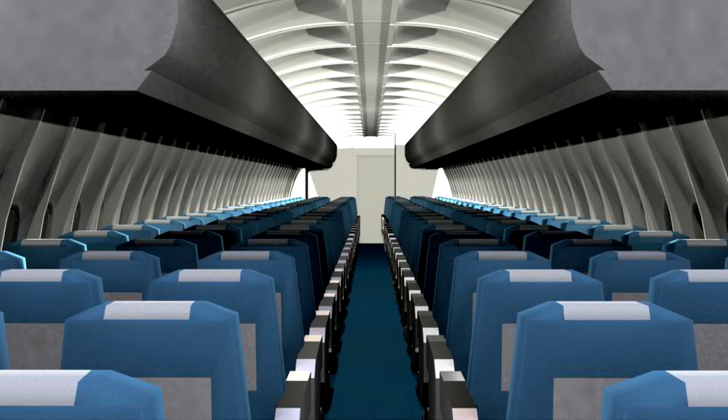In this lesson, we will look at the other components which, along with the air conditioning packs, make up an aircraft's air conditioning system. We will then examine how the air temperature is controlled and how the air is distributed throughout the aircraft. We will finish off by having a quick look at a vapor cycle air conditioning unit.

When operating on the ground or at low altitude, the charge air entering the air conditioning pack may be very humid. When the air is cooled, this humidity will condense out as water droplets. In order to prevent it raining on the passengers and crew, a water separator is fitted in the pack downstream of the turbine of the air cycle machine.

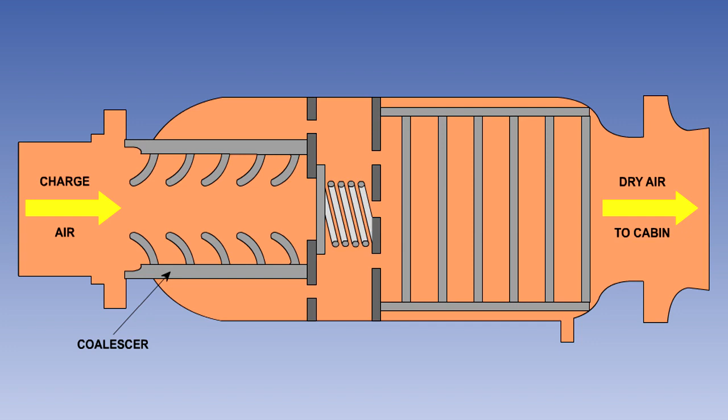The water separator consists of two parts: a coalescer and a series of collector tubes.

When the air leaves the air cycle machine, the water will be in very small droplets, in the form of a fine mist. The purpose of the coalescer is to increase the size of the water droplets. It consists of a filter, normally of coarse wire gauze.

The water droplets come together on the gauze, forming larger drops before they are carried through to the second stage, where a swirl is imparted into the air. The centrifugal force throws the water drops outward. When they strike the collector tubes, they run down to the bottom of the case and exit via the water drain.

The relief valve will open to safeguard the airflow to the cabin should the coalescer become blocked with ice or debris.

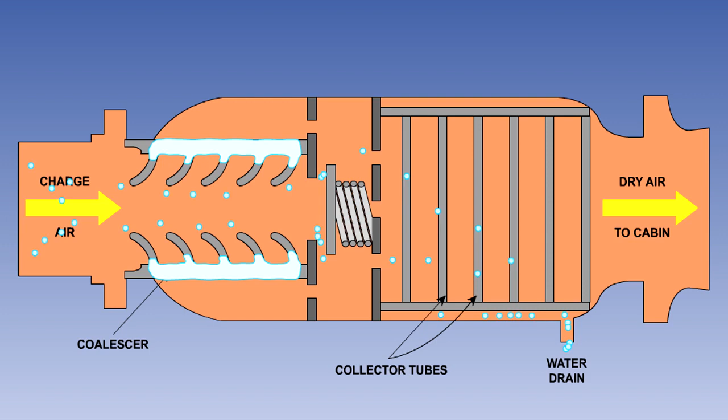The water separator does most of its work in low-altitude, humid conditions. However, at the high cruising altitudes used by modern transport aircraft, the air is very dry. When operating at high altitudes for long periods of time, it may be necessary to increase the moisture content of the conditioned air from the 1 to 2% relative humidity of the ambient air to a more comfortable level.

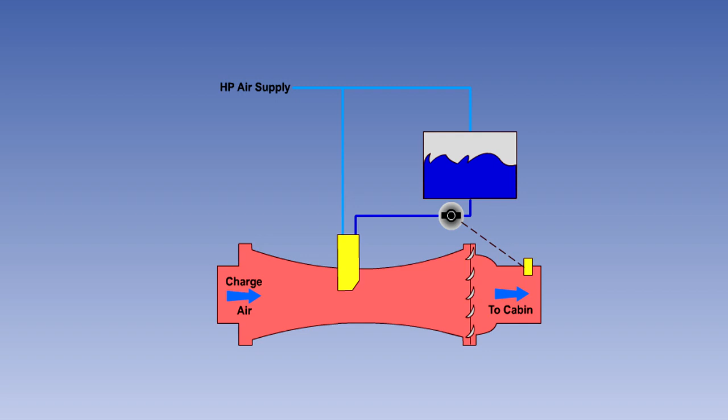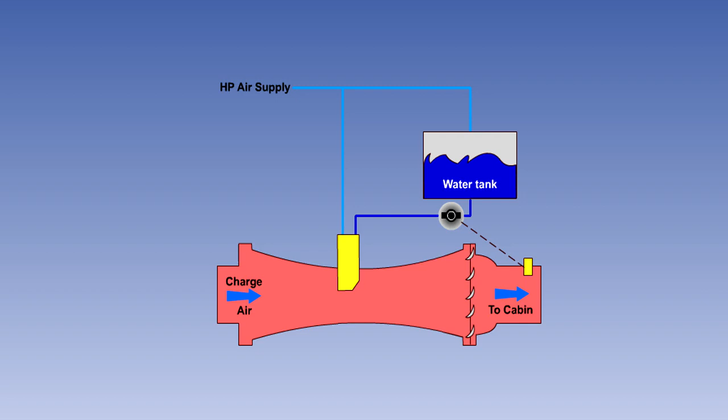The component used to do this is the humidifier, a typical example of which is shown here. The water tank contains drinking water. It is pressurized by bleed air from the engines. This tank is usually referred to as the potable water tank.

The water jet is fitted in a venturi tube downstream of the water separator in the conditioned air duct. Bleed air is also fed into the jet. This, and the reduced static pressure of the dry air caused by the Venturi effect, ensure that the spray of water mist is absorbed into the air.

The fabric-covered swirl vanes further ensure that the air and moisture are thoroughly mixed. The fabric absorbs any extra moisture, giving it back when the humidifier is switched off.

The water supply valve is controlled by a humidistat. This is a device which can measure humidity and operate a switch when a particular level is reached. It is measuring the humidity in the air conditioning duct. When the humidity falls below a predetermined level, the valve will open and humidification will commence.

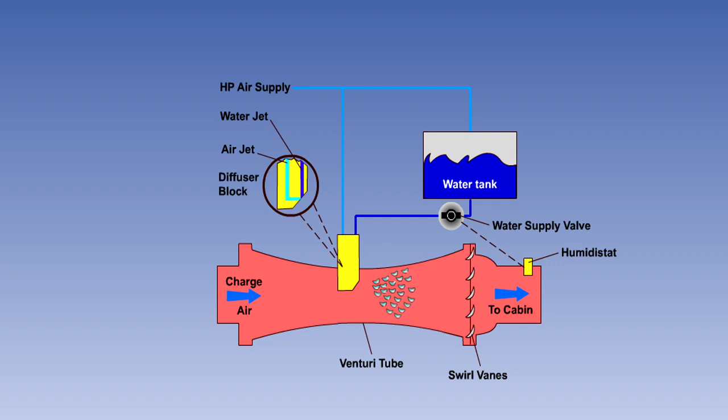The pack flow control valve may incorporate a mass flow controller, or it may be a separate unit. The mass flow controller is fitted to ensure that a constant mass flow of air is supplied to the air conditioning packs, regardless of the engine RPM or intake air pressure. This helps to make control of the aircraft pressurization much easier.

When used with blower systems, the mass flow controller operates a spill valve, which dumps excess air to atmosphere. In systems that use engine bleed air, the mass flow controller adjusts the airflow through itself, so that the required mass flow passes to the system irrespective of changes in the value of the pressure upstream and downstream of the unit. The simplified mass flow controller shown here consists of a piston with cutouts in its face and barrel, which moves inside a cylinder with matching cutouts in its barrel.

When the inlet pressure is low, the spring will push the piston fully to the left, and the cutouts in the barrels will be fully aligned, allowing maximum airflow through the unit.

As the inlet pressure increases, the mass flow will tend to increase. However, the increased pressure on the face of the piston will move it to the right against the spring, reducing the airflow through the unit. Thus, with pressure changes, the piston position will modulate in the cylinder, maintaining a constant mass flow to the packs.

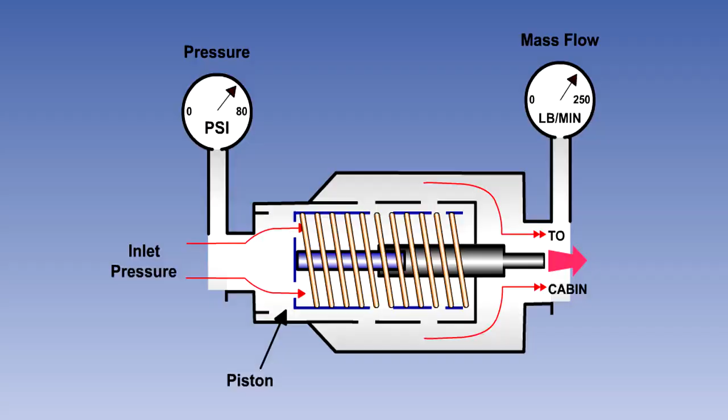Control of the pack outlet temperature is usually achieved by mixing hot air with the cooled air from the air cycle machine. The temperature control can be either manual or automatic.

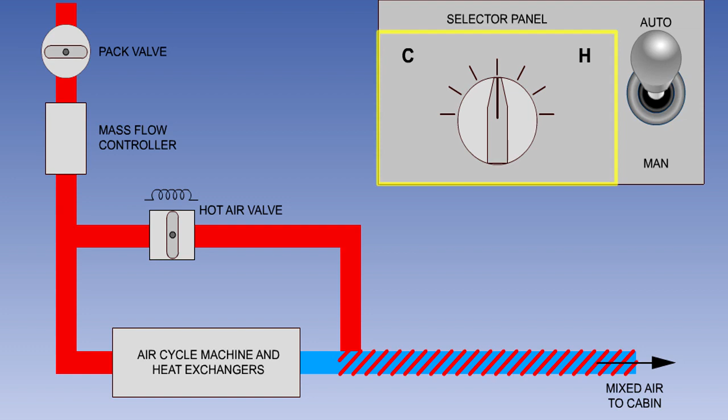Automatic temperature control is achieved by comparing a pilot-selected temperature with the actual temperature of the air. In your aircraft, you will find that the selector does not have temperatures marked on it, but merely hot and cool. However, to aid understanding, we will mark our selector with temperatures.

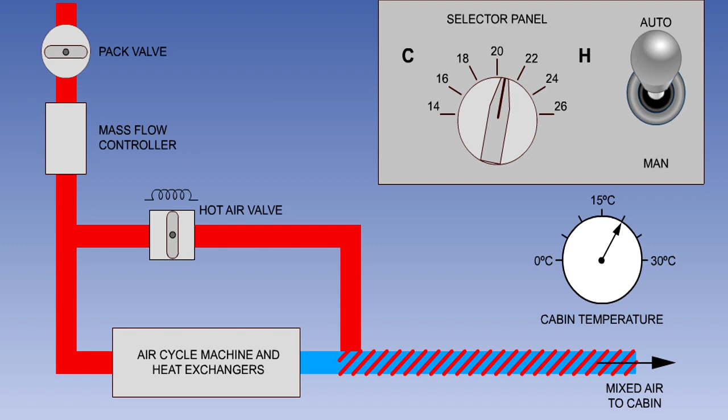The temperature of a sensor in the cabin is compared electronically with the selected value, and any difference modulates the hot air valve to allow more or less hot air to bypass the cooling components to increase or decrease the cabin temperature. If, for instance, the pilot selects an increase in temperature, the hot air valve will open to warm up the cabin. Once the selected temperature is reached, the valve will modulate as required to maintain it.

If the manual/auto switch is moved to the manual position, the hot air valve will now move in direct response to the temperature selector switch position and remain in the selected position. The pilot is now no longer selecting a temperature; instead, he is selecting the amount of hot air to be added. The cabin temperature achieved will vary with the environmental conditions.

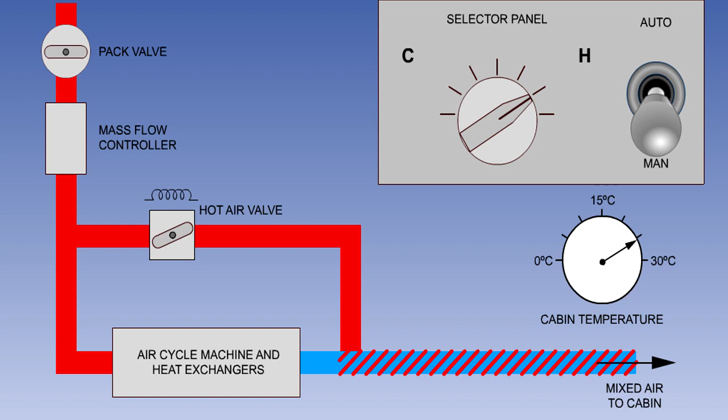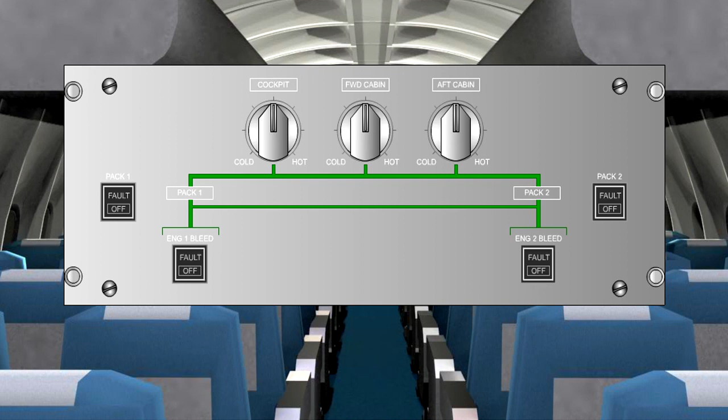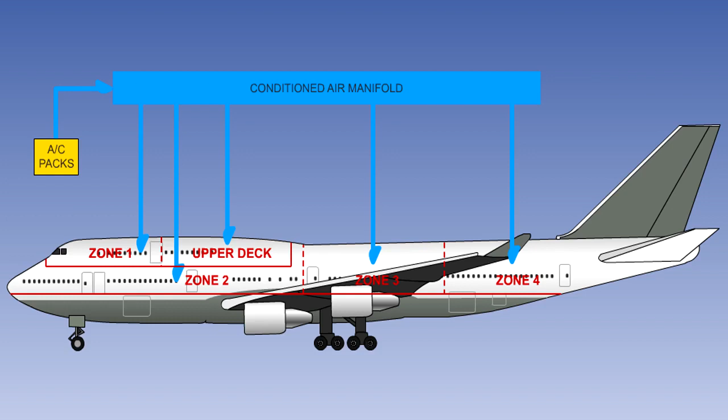In order to avoid large temperature gradients between the extremities of the cabin, it is often necessary to divide the cabin into zones and control the temperature in each zone individually. This control is achieved from the flight deck using zone control knobs or switches. The larger the aircraft, the more zones there will be. The Boeing 747 has 5 zones, whereas the Airbus A320 has 3.

The temperature of the air delivered by the packs is determined by the zone requiring the coolest air input. This will normally, but not always, be the flight deck.

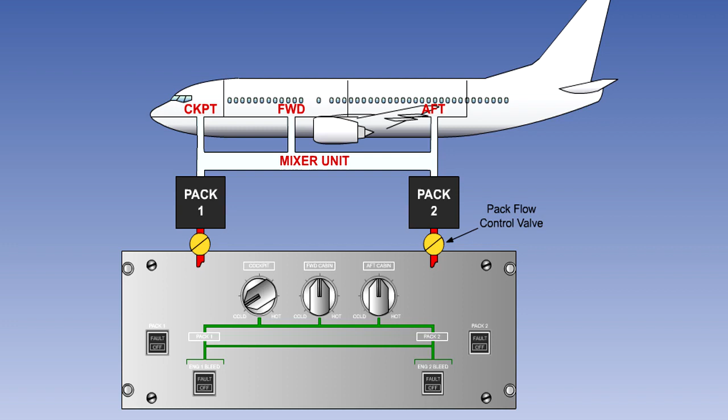Individual zone requirements are satisfied by adding hot trim air from the bleed air system to the output of the air conditioning packs. The amount of trim air added is controlled by zone trim air valves. Their positions are dependent on inputs from the individual zone temperature control systems. The trim valve for the zone requiring the coolest air will be closed.

The hot air pressure regulating valve modulates to control the pressure of the trim air. If required, this valve can be closed by a switch on the control panel.

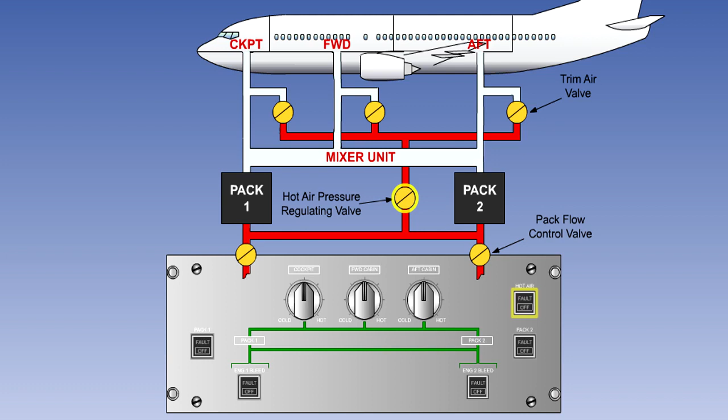Most passenger transport aircraft supply warm air to the cabin by means of floor and wall passages, and this warm air maintains the interior surfaces at cabin temperature, reducing drafts and direct heat losses, which in turn allows the entering air temperature to be closer to the cabin temperature.

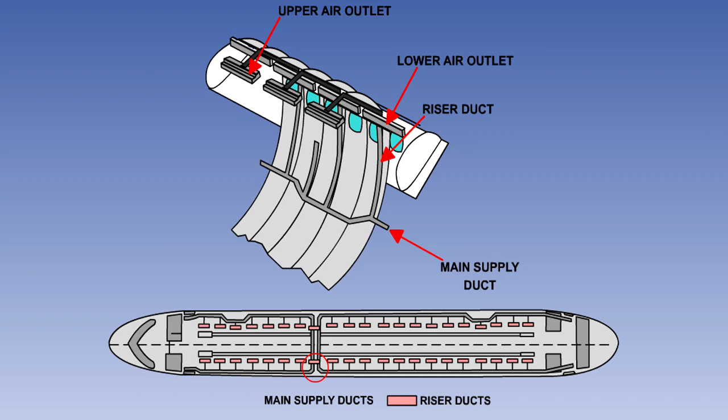Recirculation fans are used to augment the air conditioning packs, allowing a reduced number of packs to be used during the cruise, which decreases engine bleed requirements and improves fuel economy, while still maintaining a constant ventilation rate throughout the cabin.

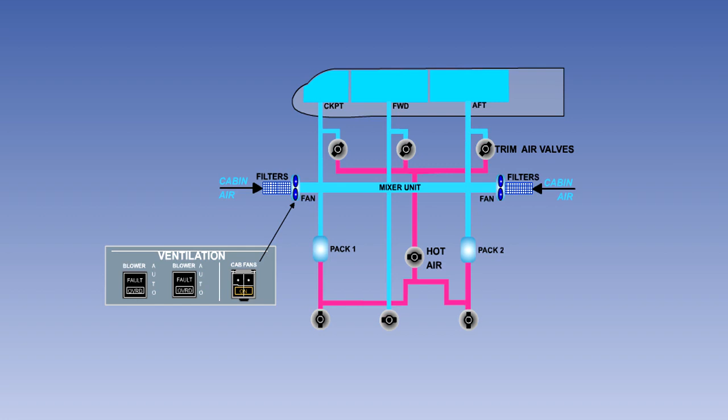The fans draw cabin air from the underfloor area through filters, then reintroduce the air into the conditioned distribution system. Air from the areas around the toilets and galleys is not recirculated, but is vented directly overboard.

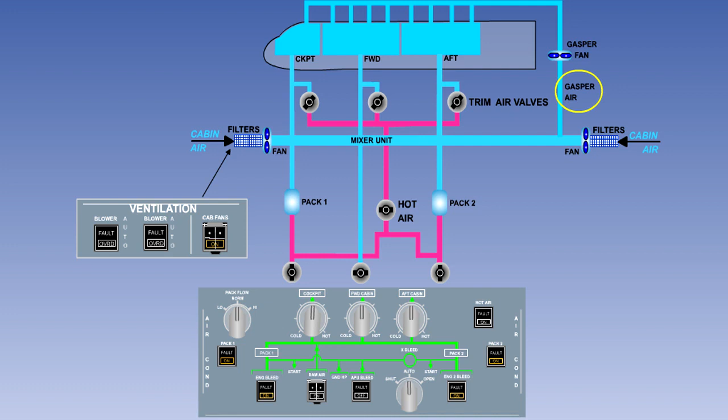The ducting is in 2 distinct sections, to provide for separate flows of cold and heated air. The cold conditioned air is supplied to the passengers individually, through a system known as the Gasper air system. Gasper air is tapped from one of the zone's supply ducts upstream of where trim air is added. The Gasper fan provides a positive supply of conditioned air to all zones through individually controlled outlets or punkah louvers.

Conditioned air is supplied to the flight deck crew stations, where it can be adjusted for flow direction and quantity. It is also supplied to the flight deck windows for demisting purposes.

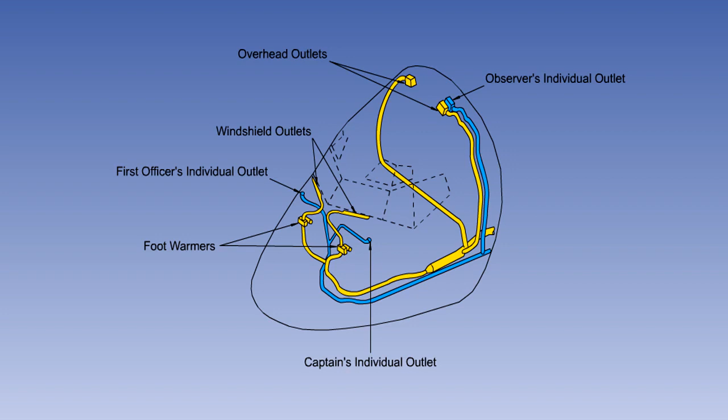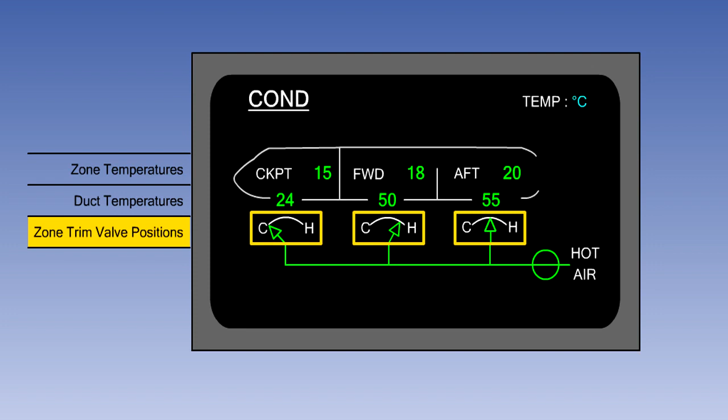The crew also receives warnings in the event of malfunctions in the system. For instance, if the temperature of the air in the trim air duct becomes excessive, the amber fault light in the switch will illuminate.

The vapor cycle air conditioning system is similar in operation to the domestic refrigerator, or the galley cart cooling system used on some large aircraft. Its use for aircraft is now generally limited to small piston engine types.

The system uses a refrigerant, normally Freon, which alternates between the vapor and liquid states. It is compressed, cooled, expanded, and heated in that order. The refrigerant is a liquid which boils at approximately 3.5 degrees Celsius at sea level atmospheric pressure. At higher pressures, the boiling point is increased, and vice versa.

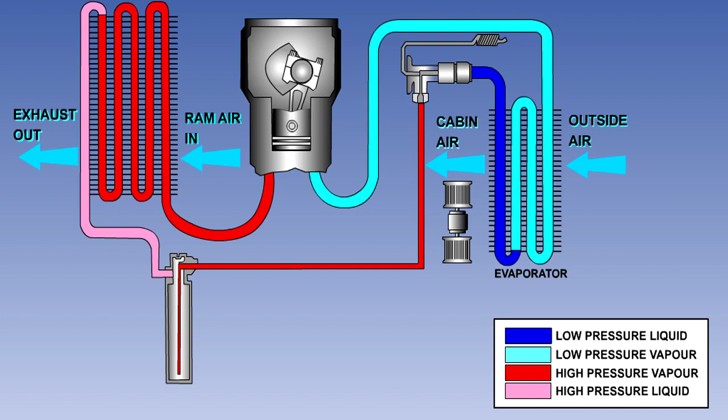The major components of the system are the evaporator, the compressor, the condenser, the expansion valve, the receiver, and the electrically driven blowers which pull outside air into the aircraft across the evaporator.

The system operates on a continuous cycle, but in order to explain the system more clearly, we will look at a unit of Freon as it makes its way around the system.

The receiver, which acts as a reservoir, contains high-pressure liquid Freon. On leaving the receiver, the Freon comes to the expansion valve. This valve allows the Freon to expand, reducing both its pressure and temperature as it enters the evaporator.

As the Freon passes through the evaporator, it takes heat from the cabin air, therefore cooling the cabin air. As the temperature of the Freon increases, it boils, changing from a liquid to a low-pressure vapor. The compressor raises the pressure and the temperature of the vapor before it enters the condenser.

The condenser is positioned so that cold ram air passes over it. This causes the vapor to give up its heat, causing it to condense back into a high-pressure liquid. The pressurized liquid then passes to the receiver, ready to begin the cycle again.

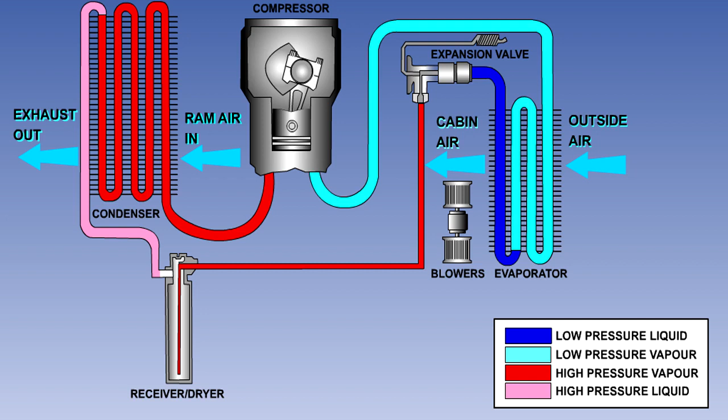That is the end of the lesson. You should now know that air conditioning systems may have a centrifugal water separator for use at low altitude, and a humidifier supplied with potable water for use at high altitude.

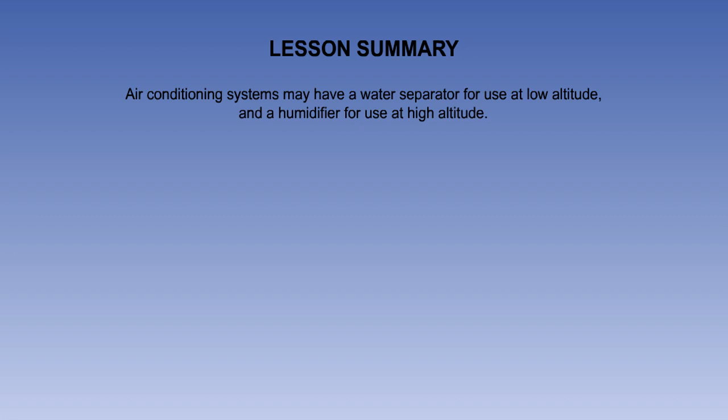You have seen that the mass flow controller ensures that the air conditioning packs receive a constant mass flow of air throughout their operating envelope.

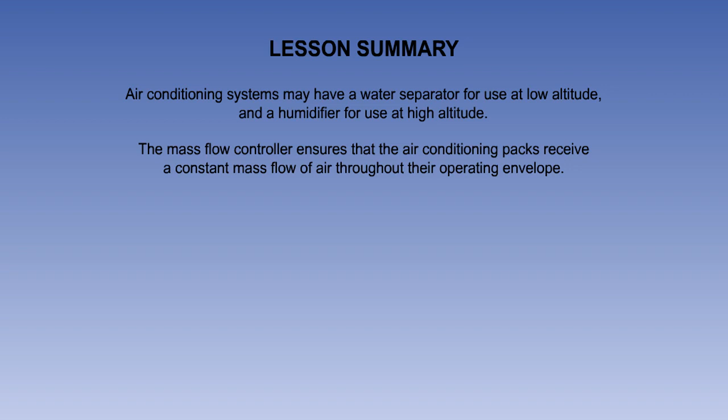You should know that the cabin is split into a number of zones, and that the outlet temperature of all packs is set by the zone requiring the most cooling. Zone trim valves add hot air to the other zones to satisfy their requirements.

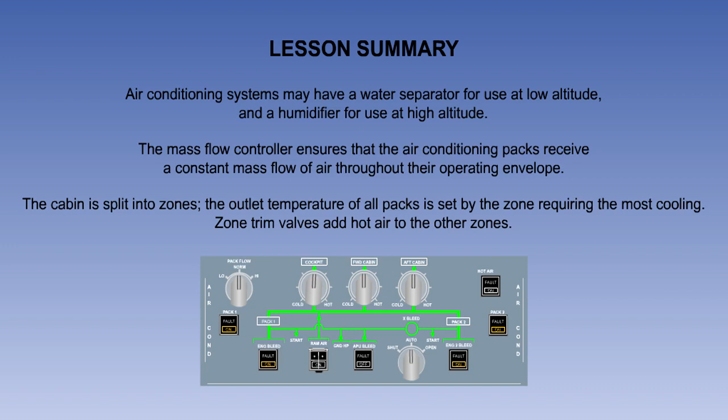Recirculation fans are used to augment the air conditioning packs. And the Gasper system supplies cool air to individual seats. Finally, you should have learned that on some smaller aircraft, a vapor cycle air conditioning system is used.